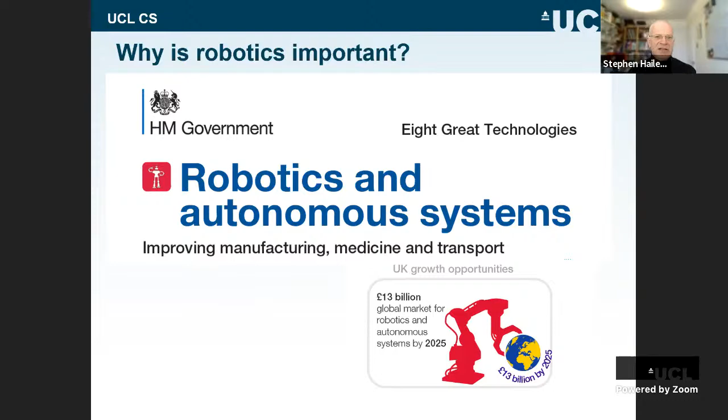In any robotic system, there are a variety of components. There are sensors that take readings, that take images from the real world. There are actuators that make changes to the robot so it moves. And then there's something that sits in the middle that acts as the glue, that's a form of control. So given some sensor information, we change the actuators based on an algorithm.

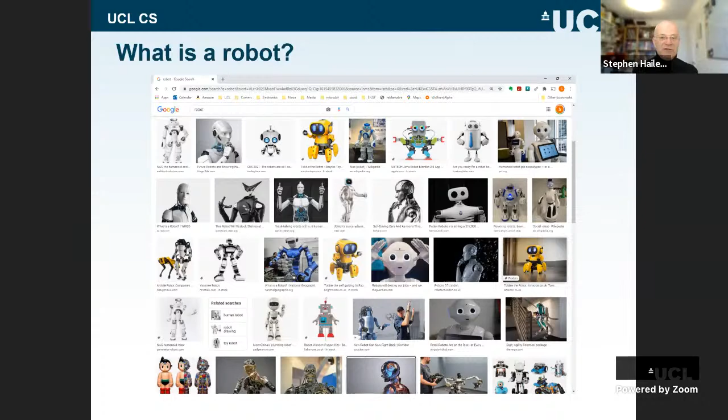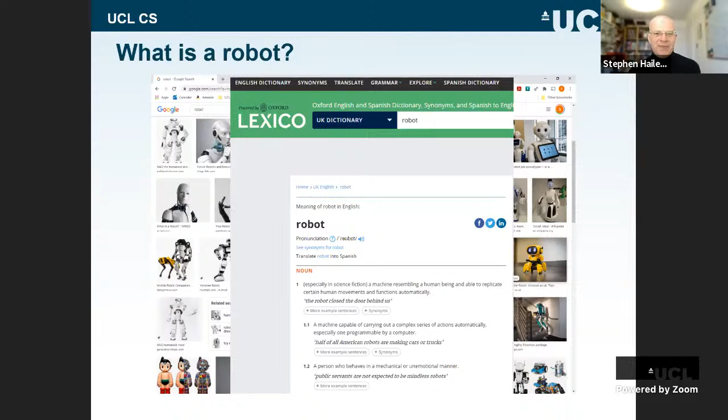At the basic level, robotics sounds very simple. It's sensors, it's actuators, it's some control. But in reality, that's not quite the case.

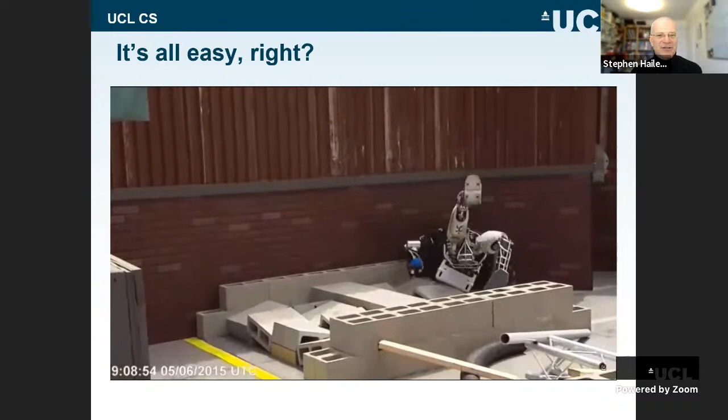Let's play this - right, so this is from 2015. It's a DARPA robotics challenge. And these are the fails - this is the fail reel.

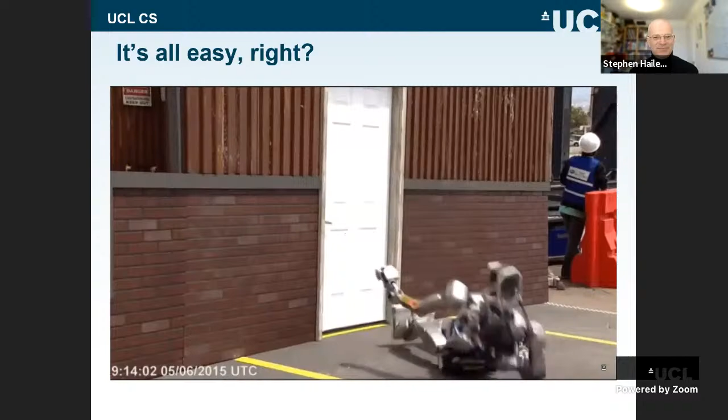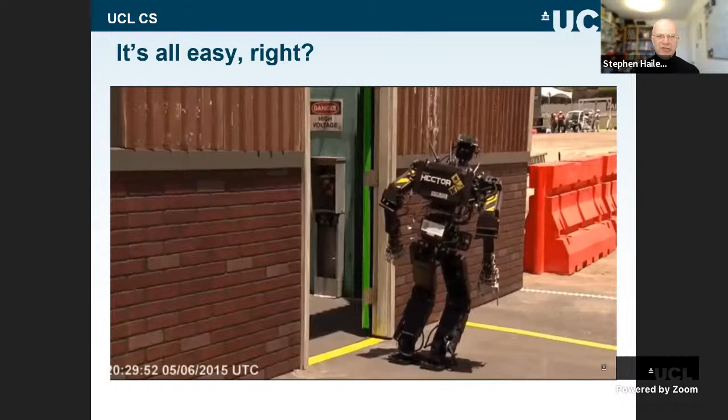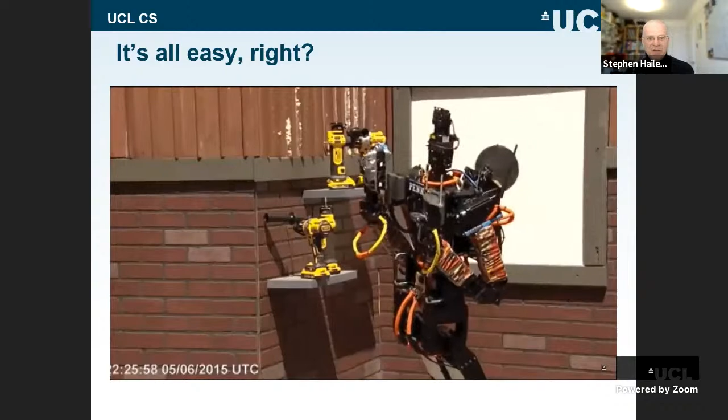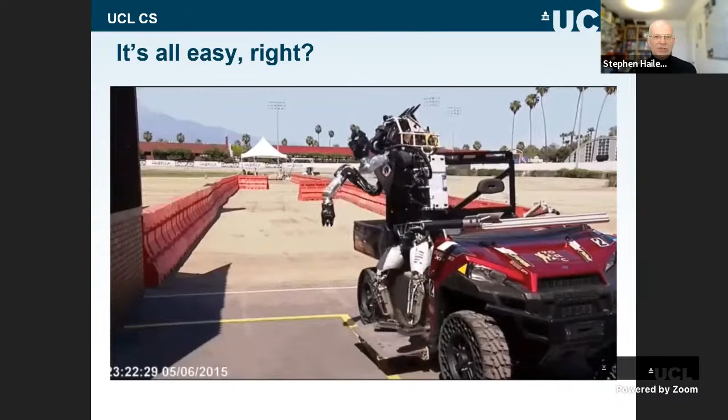So the question is, why is it challenging? I've just presented that it's a relatively simple thing to do, but actually in reality it's challenging because we often have very high level, very complex goals. Search a building, clean the house, play football, are quite complex, high level goals that have to result in behaviors down at the level of moving a motor from one place to another. The environments in which these robots exist are very dynamic and complex. It's not easy to pick out what's in a scene, let alone what to do with it once you have. They have to handle their own dynamics, which is quite complex, and there's a lot of noise in the system as well.

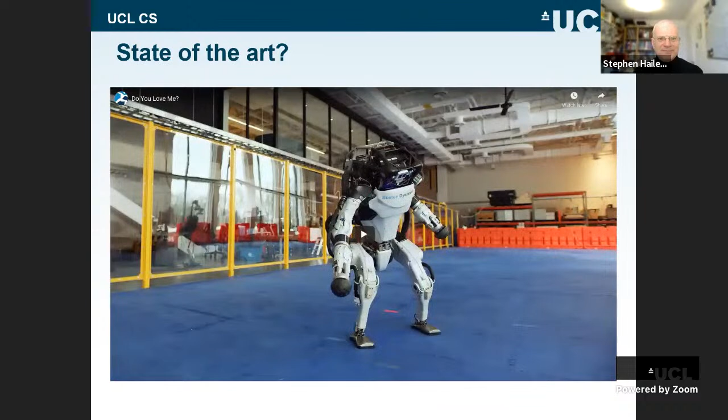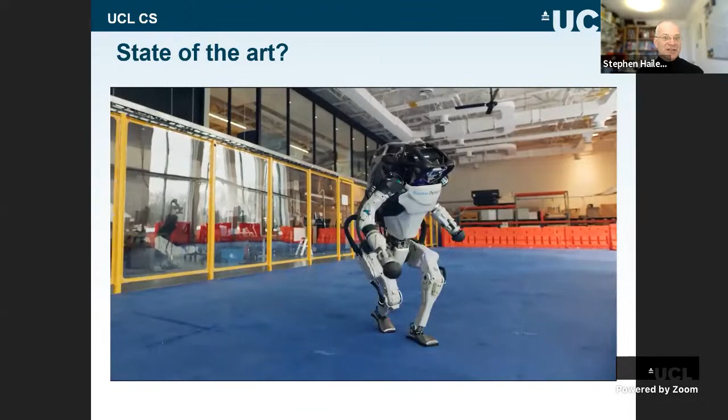So let's see if this will play. That was 2015. This is late 2020. This was posted in December. It's one of the Boston Dynamics robots, or it should be. And it's now achieved a level of facility that looked improbable 5 years ago. In fact, it's achieved the pinnacle of artistic expression: dad dancing. So that's where robotics is right at the moment.

But this talk is really about transdisciplinarity. At the moment we have robotics as an interdisciplinary subject, but in future, my view is it will become a discipline in its own right through a process of transdisciplinarity. So let's have a talk about that.

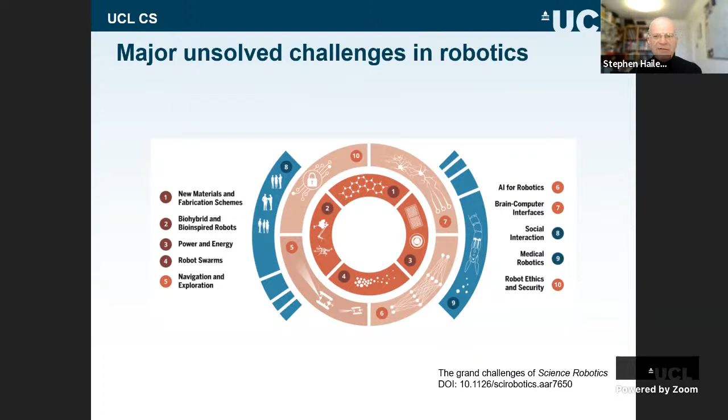It's still got that interdisciplinary feel, and it's broadening its scope. So we're starting to see things like biohybrid robots in there, robots that are part biological agent, part computational agent. And we start to see things like social interaction as well, and consideration of robot ethics, but it's still really very focused on robots, making effective robots.

So what I promised in this talk was something that goes from architecture to zoology. And actually, there are two pieces of work here that I'm going to talk a little bit about, and a little bit about the interaction of architecture and zoology with robotics, what we can learn from them, and what we can learn from these pieces of work.

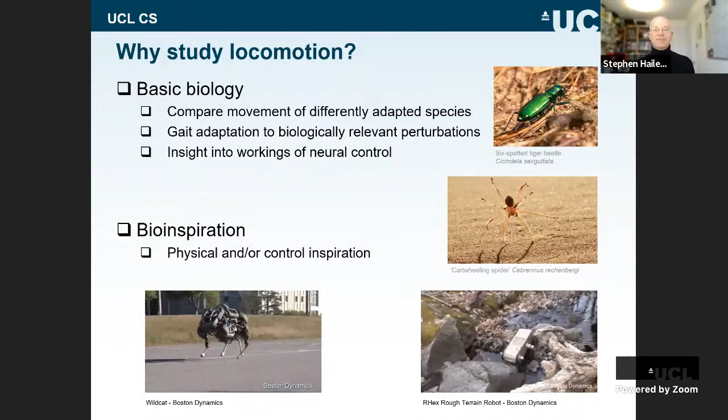So different gaits in animals are optimized for all sorts of things, right? They could be optimized for speed or energy, reducing forces on the musculoskeletal system, and they can be adapted due to terrain, rough terrain, or obstacles in the environment, or even injury and damage. I'll come back to that one specifically very shortly.

And that's a mixture of mechanical design. There's actually a mechanical feedback system that's partly down to the carapace of the cockroach, and the fact that the neural signals here are not making their way to the central nervous system. They're acting directly between the environment and the musculoskeletal system. So it's a good way of having very quick reactions.

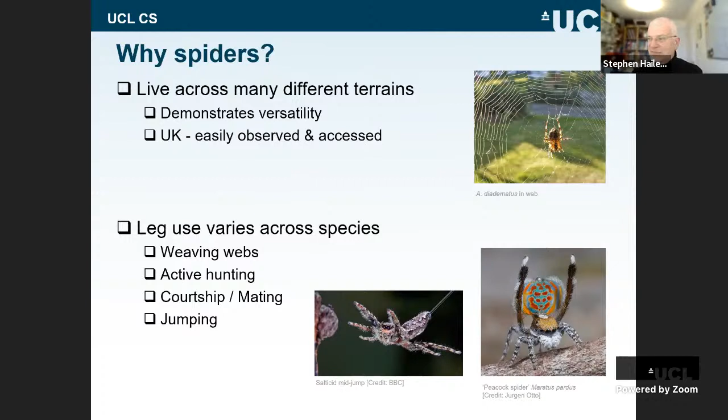We live with spiders. They use their legs for a whole variety of purposes, not just locomotion. So they use them for weaving webs, hunting, or jumping. Some spiders jump, for example. And there's been a history of spider-inspired robots.

Now, spider legs are hydraulic in nature. A spider lacks some leg extensor muscles, and the way it extends its legs is by shutting a valve to its lungs and raising its blood pressure, and opening a valve to the relevant leg, and that stretches the leg out, or helps stretch it out. And so quite a lot of research on spider-inspired robots has focused on that hydraulic mechanism, or actually on things which are sort of spider-shaped rather than spider-inspired.

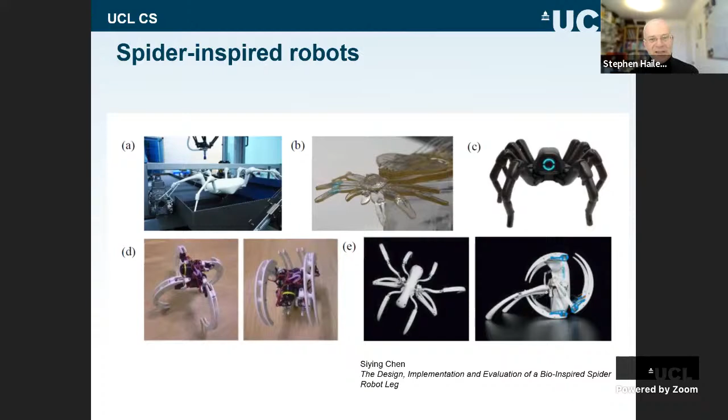We've tried some work on this. This is the work of another MSc student, inspired by Michelle's work with real spiders. We built a pneumatic spider leg to look at the control mechanisms for that.

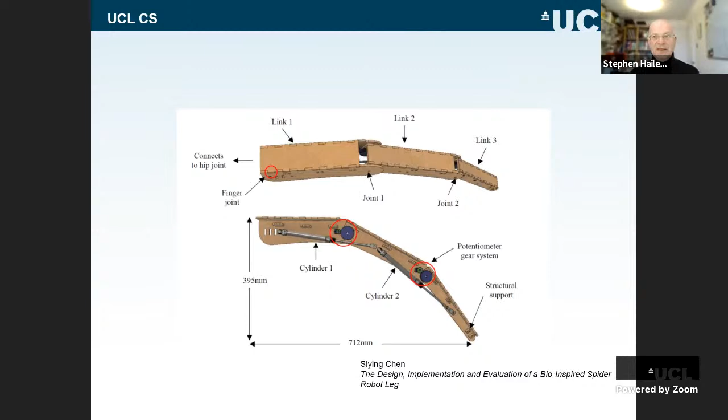But from Michelle's work, what we're really looking at is not just the mechanism for a single leg, but how legs go down collectively. So if you imagine a six-legged insect, typically insects move by putting down three legs, standing on a tripod, which is a stable base, and then moving their other three legs.

It turns out it's more complicated than that. Although it looks a bit like that by eye and from high-speed video, in reality phases alter with speed. They can be slightly different, even across similar spider species. And the exact movement pattern seems to depend on leg position, so there are different phasings depending on where the leg is on the body.

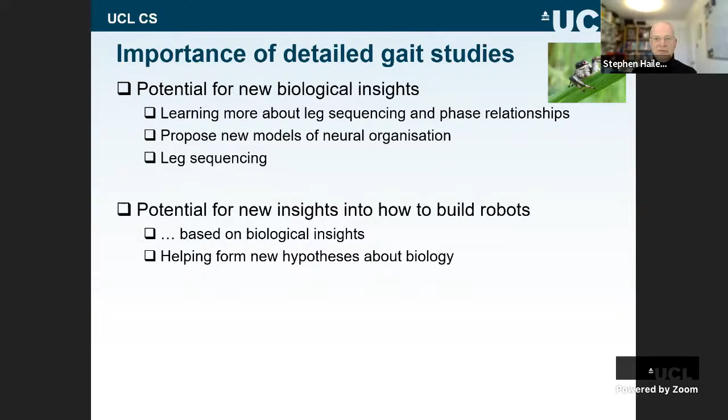Now another interesting thing is about autotomy. Spiders with 8 legs, the legs give them advantages in terms of movement, but they can also carry a disadvantage - it gives predators more to get hold of them by. It also means that if spiders are moving over rough environments, legs can get trapped. So spiders have evolved a mechanism of autotomy - they can drop their legs, they just lose legs.

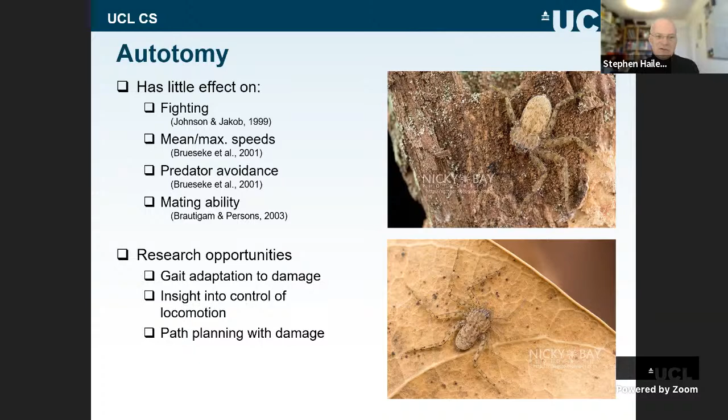Anything up to about 40% of spiders found in the wild have lost 1 or more legs. This doesn't have a huge amount of effect on pretty much anything spiders are interested in doing, up to a certain point. But it's interesting to see how they change their gait when they lose legs, because we can imagine opportunities in robotics where, again, 8-legged robots, if a leg gets trapped in an uneven environment and can't be recovered, we could drop it and find a way of adapting our gait to deal with 7 legs or 6 legs, whatever we're left with.

We tried this in 2 different types of spider, the wolf spider and the European garden spider, which is an orb weaver. The wolf spider hunts prey, doesn't make a web at all - it hunts prey, sort of sneaks up on it and jumps on it. But the orb weaver weaves a web.

What we found was that when spiders had all their legs, the wolf spiders moved faster because it's in their interest to move faster, but they had a broader range of speeds. In fact they had 2 distinct speeds, a slow speed and a faster speed, and their gait changed as the speed changed. For the orb weavers, the range was much smaller and actually only had a single gait.

We looked at their gait after autotomy, and you can see that if it's intact, it's moving here. If it's lost a limb, then the speed drops really very considerably, but it can still move. And if it loses 2 limbs, the speed increases slightly. This is probably to do with the effort of synchronization in some way - we don't know at the moment. And we don't see that pattern replicated in the orb weaver.

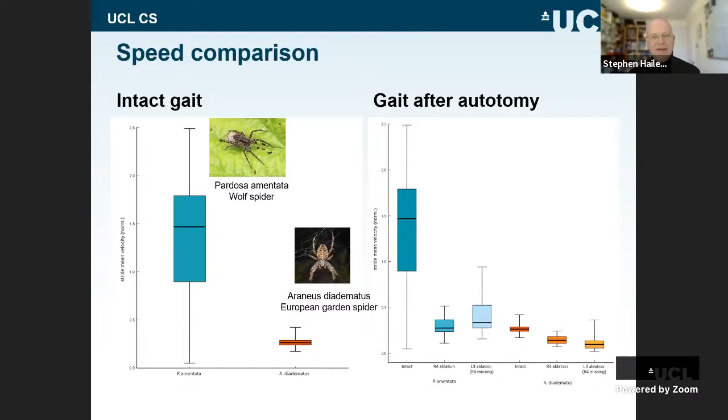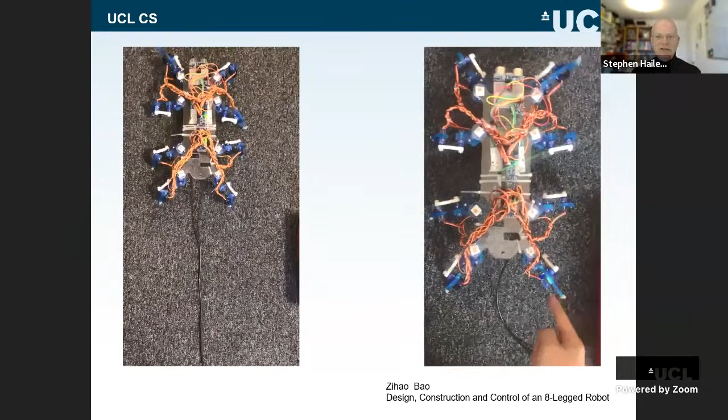Now we've taken that into design of our own robots. These are obviously very simple robots, but the finger on the right-hand side is pointing at legs that have been taken out of commission. So again, what you can see from this is that sort of metachronal gait - it's moving as a tetrapod, but there's a rippling effect through the tetrapod as they're moving forwards. And in the case where a limb has been taken out of action, it can still move. So we've learned something we can apply actually to robotic systems.

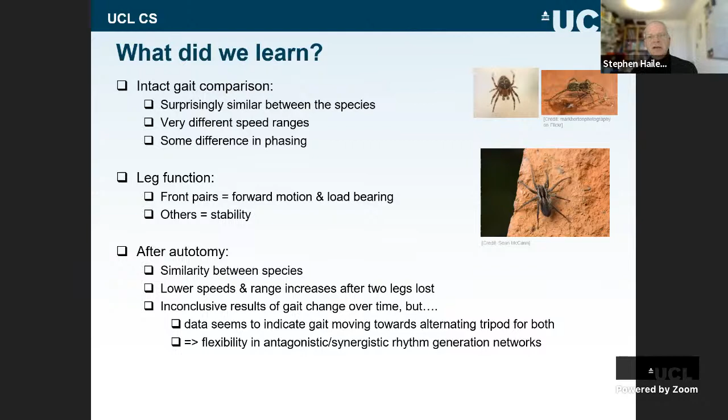I think I've said most of this at the moment. We learned quite a lot about the biology of spiders, and we learned how to apply that biological insight to robotics. There's plenty more to do here.

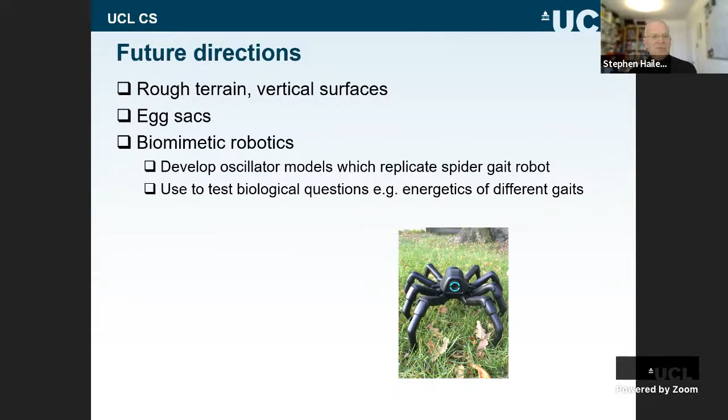We can look more at rough terrain. Our spiders all ran on planar or relatively simple environments. We didn't look at them on vertical surfaces, or look at egg sacs or adding weight to spiders—they're used to carrying eggs around, and robots that can carry things are always useful. There's a bunch of more work we can do on biomimetic robotics here.

So where does this come in when we start thinking about UCL EAST? Well, as Paula once said, the big challenges in the world are likely to be solved when we move beyond what have become traditional academic boundaries. Now, we'll re-establish new boundaries, but we need to be breaking down those barriers in order to achieve the most we can out of this. That's fundamental to the philosophy of UCL EAST.

In terms of the robotics world at the moment, robotics is an interdisciplinary subject. It's got a long history stretching back decades into industrial robotics. But the growth and reach and its importance for the future means that we really need to be considering non-traditional robotics disciplines and fusing those into the mix of those traditionally associated with robotics.

It offers a new opportunity to create a robotics offering which has disciplinary depth. We need people who understand the electronics and the mechanical systems and the control. We need people with an interdisciplinary mindset who will work with others to achieve interesting goals. But we want people who are looking to create a new discipline here—so they've got a transdisciplinary outlook.